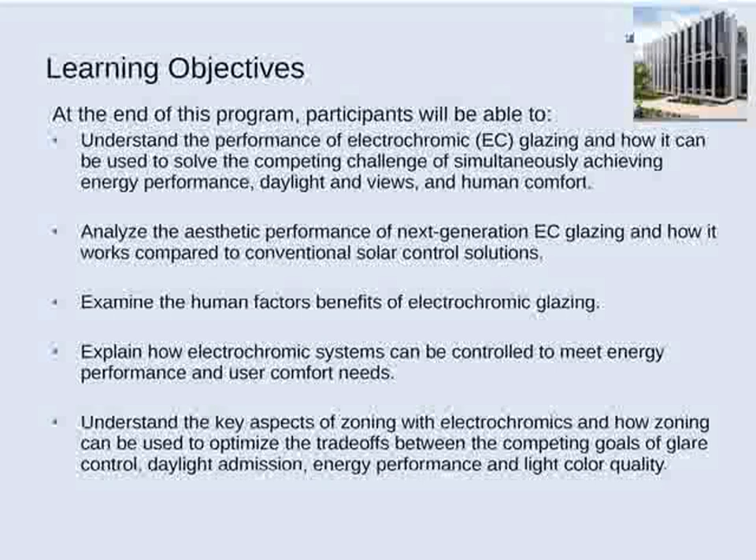Okay, a good place to start is back at the beginning of our records of human civilization. We've got this quote: 'Ever since the first cave people crept indoors for safety, humans have sought to bring sunlight in from the outside.' So we can see from records of anthropology how humans have evolved over time. Starting with some of our earliest civilizations, the challenge has been for people to seek shelter indoors, but with that comes a problem: how do you light interior spaces.

Obviously, with the first cave people, there were interior fires being built. As you fast forward through the progression of technology and urban trends evolve, we're able to build bigger and larger urban systems. With improvements in building construction technology, we can build larger and larger buildings. If you fast forward to the end of the 19th century, we finally improve electricity, and through Edison, Tesla, and Westinghouse, we bring electrical lighting into interiors, which is a revolution—now we can illuminate interior spaces through electricity. Building trends change even further.

As we move into the early 20th century, we're building large tenement houses with large air shafts to bring in light and air. We're constantly trying to answer this question of how to effectively light interior spaces. As we move into the mid-20th century, the 60s and 70s, we build really deep-inset buildings with deep recessed footprints and a lot of fluorescent lighting. Just as many things do, tastes and preferences change over time, and what we're seeing today is a real reliance on solar energy and daylighting to light our interior spaces. That's where we're really moving.

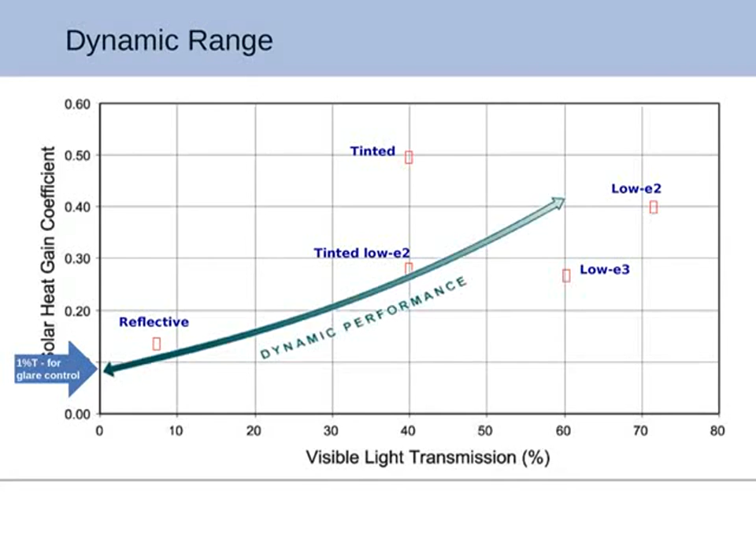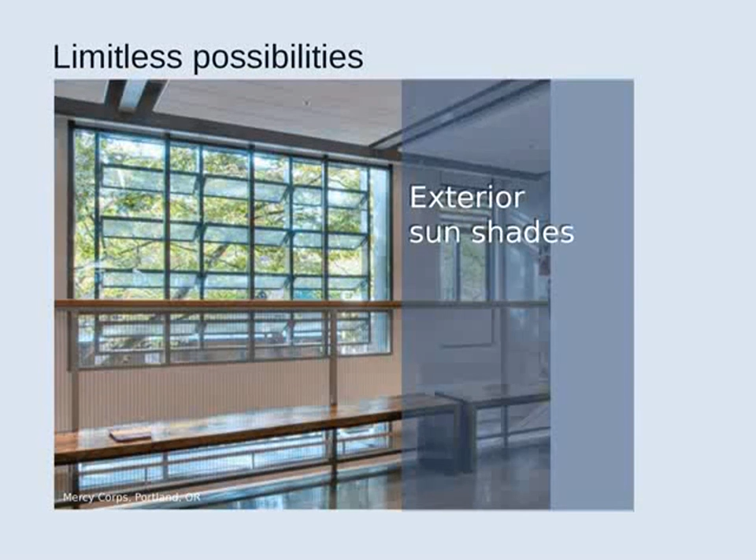And that's in conjunction with standard low-E glass. Now, it's important to talk about aesthetics here. Not all electrochromics are the same, and today we're still pioneering the technology, and it's improving more and more. On the left, I'm going to show you some of the first generation electrochromics, and on the right, where we are today, and where we're improving even further.

But in the clear state, let's go back for a second. You can obviously pick out which IGUs are that Generation 1 glass, with those bronzy, reddish, yellowish-looking pieces of glass. Exactly right there, and that sticks out compared to your standard low-E glass.

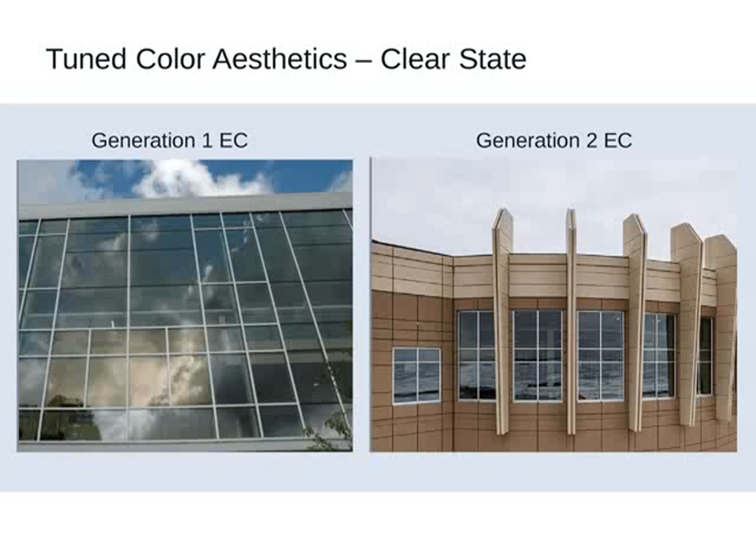However, where we are today, on the right, you've got the much crisper, clearer aesthetic, which is something we've improved on. And when we go to the tinted state, you can see that before, when it was tinted, you had this real dark, almost a black hole effect, which did not really achieve the aesthetic we were going for. But now, in Generation 2, you've got a much clearer, crisper, neutral reflection that is more in line with modern architectural edifice.

The next slide shows you the tinted state. We can't call this a privacy glass, but when the glass is in the tinted state, you can see it has a real reflection, as if it were reflective glass itself. That's because we've improved on the optical tuning layer from Generation 1 to Generation 2. This is an example from the Boston Museum of Science.

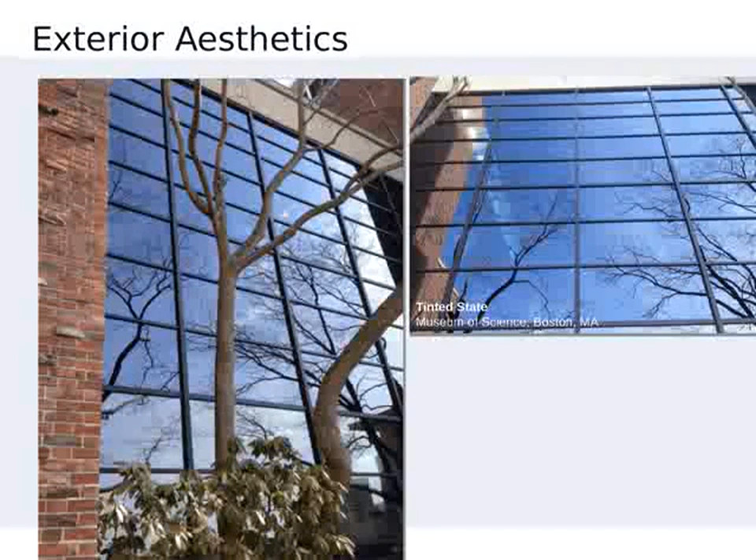This shows that there are different zones of control on this large glass facade. As we go to the next slide, it shows you from the interior. Here's a split shot of the interior on the left and the exterior on the right. On the left, there are actually two zones of tint control: on the bottom that's 20%, and on the top you've got 1% visible light transmission.

But then as you look on the right, regardless of what level of tint you're achieving, you see a nice uniformity, so you don't have almost a checkerboard fashion of aesthetics. As long as it's in any one of the three tinted states, you're going to have a nice uniformity, and you can't really tell what level of tint those zones are at from the outside. However, you can definitely tell on the inside that there are different zones of tinting.

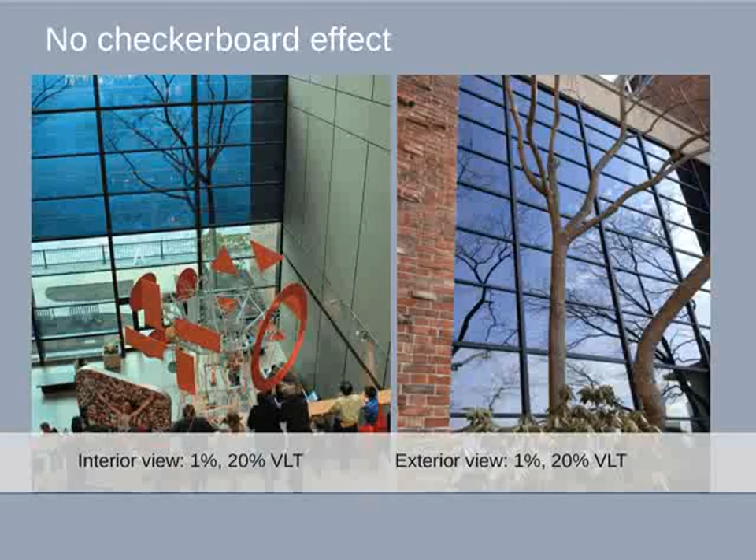Just on the same line of aesthetics, it's worth mentioning that from the interior perspective, the hue is going to be blue, as you've seen that blue hue. The reason is the technology as it's been developed: when that electrochromic coating is energized and solar light comes through, the light falls on the visible spectrum and peaks in that blue portion. That's just the characteristic of the glass.

However, from the exterior, we can have a variety of outboard color options which are complementary to the aesthetic for your particular project. The four standard colors we have are clear, blue, green, and gray. Custom colors are also available — you can see here, in the Minneapolis-St. Paul Airport, they have an evergreen motif aesthetic already, so they were able to match dynamic glass with an evergreen exterior hue to get in line with the current characteristics of the airport.

Another application: one example of historic preservation at the St. Johnsbury Athenaeum in Vermont, where they had a skylight with standard leaded glass that had to be periodically whitewashed to preserve the artifacts inside.

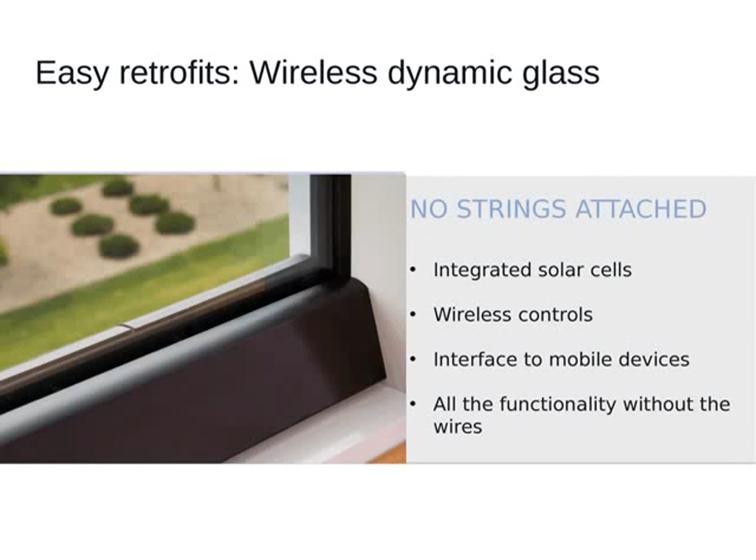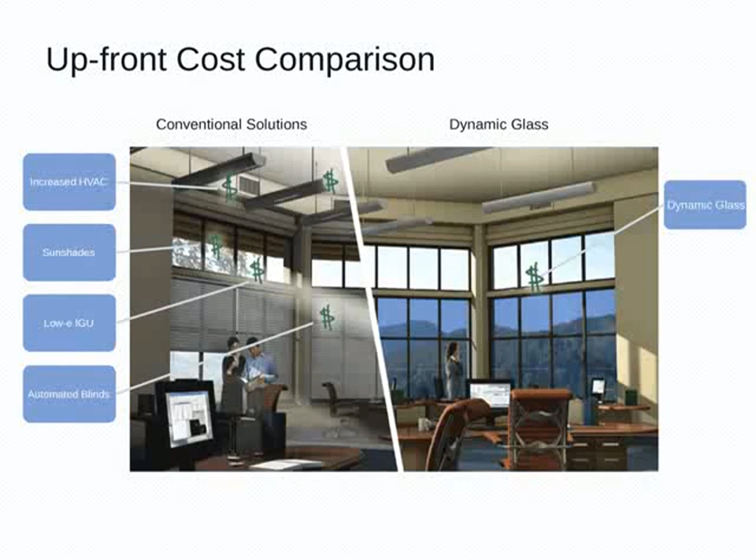The idea is that a happy, healthy workforce is a component of a productive, successful business in the long term. This comes from the World Green Building Council's WELL Building Standards, reflecting a real revolution in considering people as a measure of return on investment.

So going back to that apples-to-apples comparison in the next slide, this shows an example of the dynamic glazing solution compared to a static solution.

In this case, they're also employing the cost of sunshades and auto interior blinds, and the differentiation per square foot comes to $1 in this case.

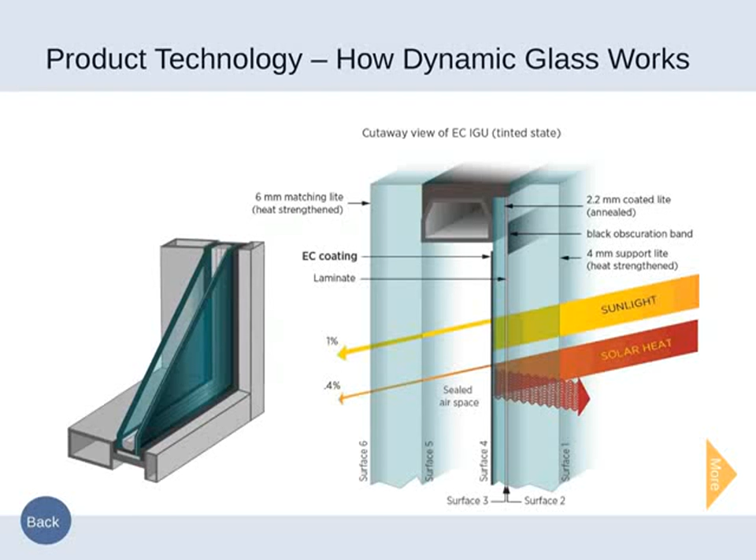This is just illustrating a little bit up close and personal how that electrochromic coating works. It's worth mentioning that the actual electrochromic portion on that annealed glass is less than the width of a human hair, so we're talking microns thin. It's essentially 5 layers of coating, and in this case it's lithium ions which are rearranging themselves.

This is showing you the tinted state, where those lithium ions, when they're energized at low voltage, rearrange themselves to go from coating 2 to coating 4 layer. That's what creates that tint, that blue hue. It's that rearrangement of the lithium ions through that conductive, translucent coating. That's essentially what that electrochromic coating is all about.

This slide, which needs to be updated, compares single pane clear to the ASHRAE standard, showing the percentage of annual energy savings and peak demand reduction. This was published in 2010 from studies by Paladino and Co. Looking at the DC example, comparing electrochromic double pane glass to single pane clear, you're looking at 45% reduction in annual energy savings and 35% in peak demand reduction. Comparing it to the ASHRAE standard, it's a bit less: 22% annual energy savings and 18% peak demand reduction.

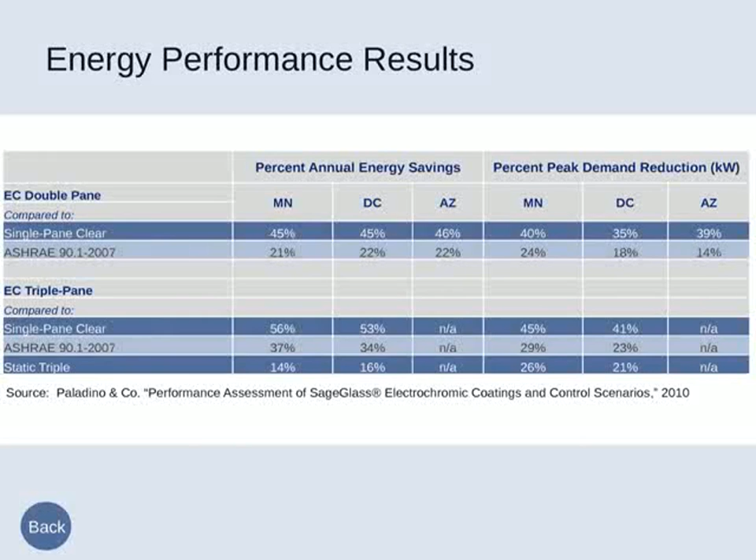Now this is just an illustration of how the system works. Starting with the electrochromic glass IGUs, every IGU has a connector, and it routes through a 4-conductor cable, low voltage system, into a terminal box. This is just one standard example - depending on the size and scope of the project, you may not need a terminal box, it may just go directly to an output panel. But if we're running multiple IGUs over a distance of about 150 feet, those IGUs will be routed to a terminal box, which also picks up an exterior light sensor.

One question we get asked is, how does it work - is it an automatic process, or does it have a manual override? The answer is it has both. The exterior light sensor has pairs of sensors per set of IGUs: a high-angle sensor and a low-angle sensor. The low-angle sensor detects when the sun is setting and picks up that light, while the high-angle sensor picks up the lux level when the sun is high in the sky. That's what controls the automatic tinting and clearing of the glass throughout the day.

That is routed to a central output panel, which, it's worth noting, can be integrated with a BMS system if you have one. This also has smart chip technology so you can route the signal from an iPad or iPhone app into this output panel and control the override system that way. You also see the wall switch, which feeds directly into the output panel as an override as well. So those are the two means of override in this one example, completely customizable depending on the project.

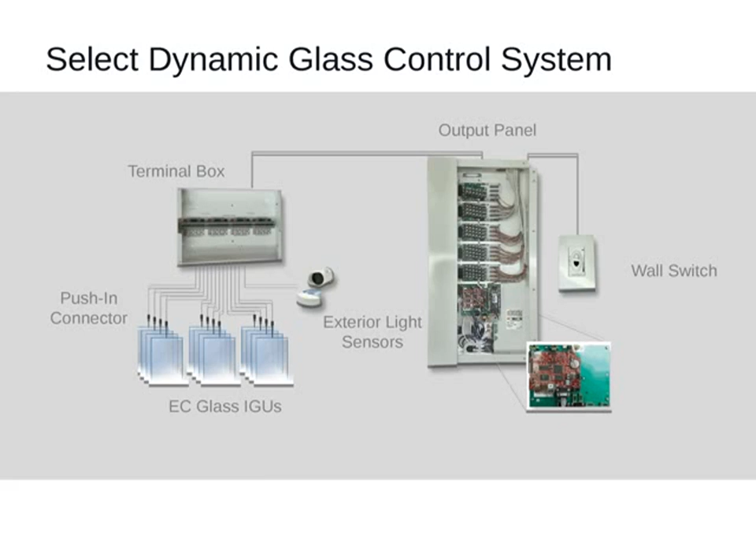This just covers what I went over - you've got essentially an automation system that can work automatically, or you can have the manual override or the mobile application. So it's completely customizable depending on the needs of the end user.